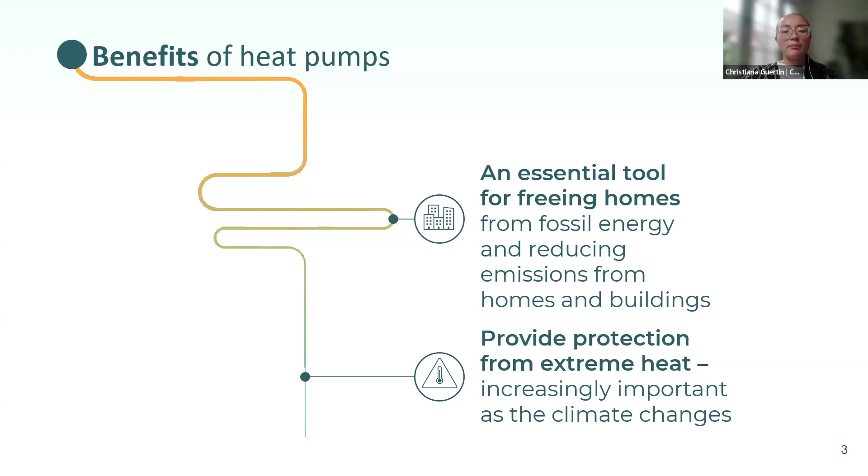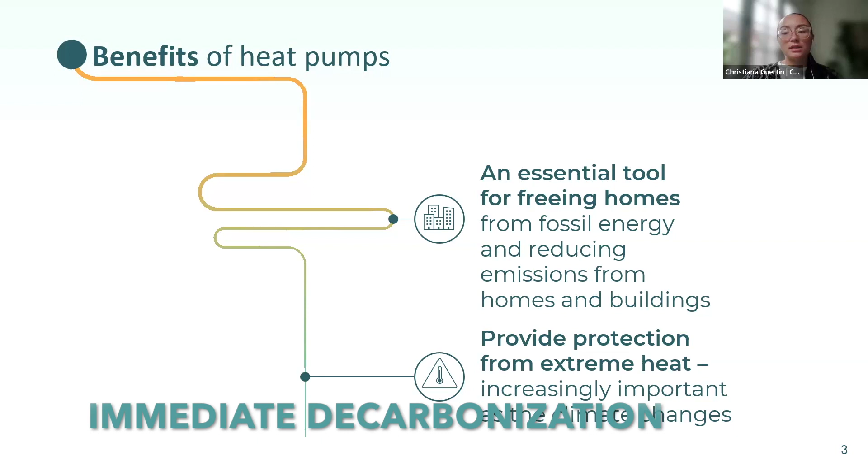So first, I'll start off by introducing the benefits of heat pumps. There are two benefits we've introduced in this report: the resilience perspective and the emissions perspective. From an emissions perspective, heat pumps are crucial in decarbonizing space heating and cooling in homes and buildings. Currently, burning fossil fuels for space and water heating in Canada's buildings accounts for 10% of Canada's total emissions. And the switch from fossil fuel boilers, gas furnaces, or oil furnaces to electricity-powered heat pumps creates immediate decarbonization benefits, especially in regions where grids are already powered by low-emitting electricity, like Quebec, Manitoba, and British Columbia.

But even in regions with relatively high grid intensities, heat pumps emit between 20 to 30% less carbon emissions than gas furnaces because of their high efficiency. So overall, many studies, including ours, have shown the importance of decarbonizing the heating sector in Canada and the effectiveness of heat pumps in getting there.

From a different perspective, heat pumps are beneficial as they provide protection from extreme heat because they double as heating and cooling. Not many consumers know that heat pumps act as both a cooling and heating system, but they do. And with heat waves becoming more frequent and intense across Canada, access to space cooling is increasingly important. So from a resiliency perspective, heat pumps are better than traditional ACs to meet cooling needs because, one, as we'll show in our analysis, they tend to be cheaper, and two, they provide protection from extreme heat in a way that doesn't make the problem worse, whereas ACs tend to lock households into fossil fuel heating infrastructure.

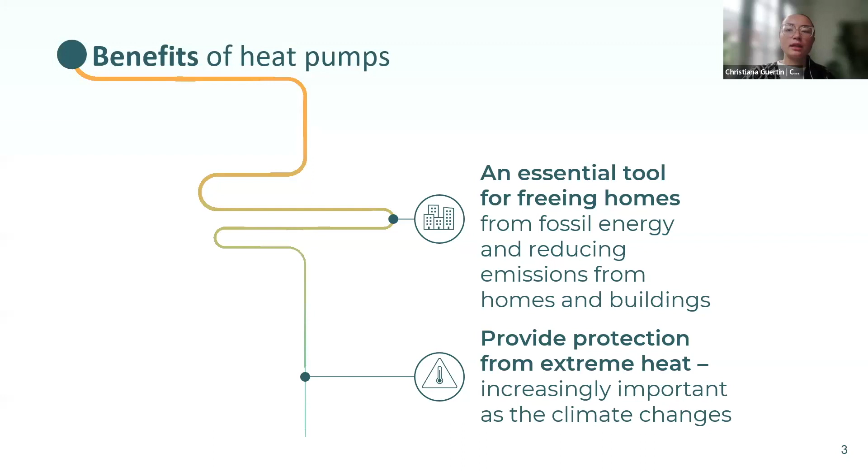So after having gone over the benefits of the heat pumps, I'm going to dig a bit deeper into our modeling approach. So first, we modeled 5 Canadian cities, including Vancouver, Edmonton, Toronto, Montreal, and Halifax. Each of these cities reflect different equipment cost, governmental rebates available, energy prices, and climate conditions.

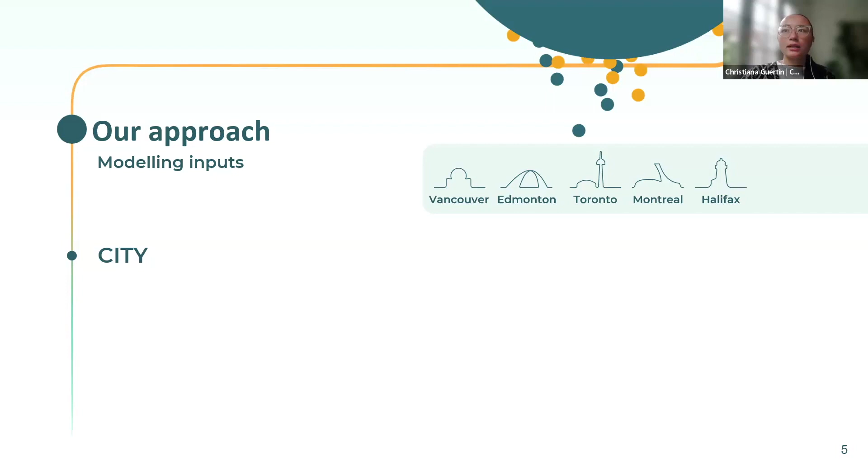Then we captured different building types, including different building ages. So the buildings modeled include single detached homes, townhouses, and 2 types of multi-unit residential buildings, or MURBs, one with a central heating system and one with in-unit heating system.

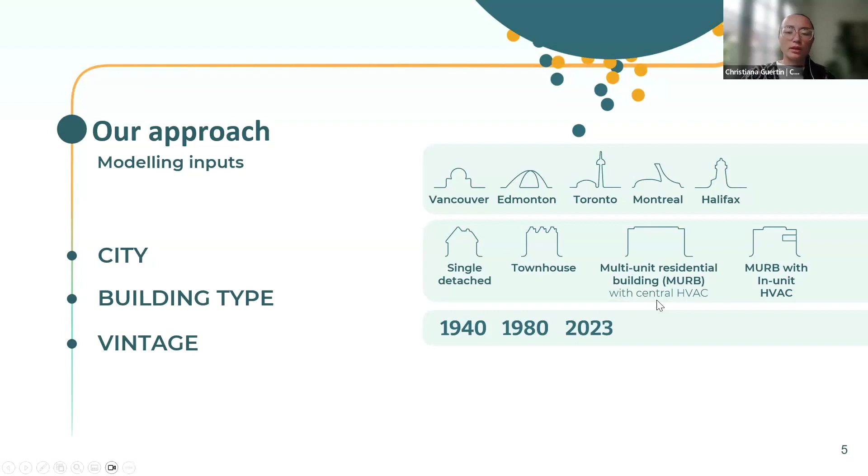And then finally, we've modeled 4 main equipment options. The first representing our business as usual scenario, which models gas heating with traditional air conditioning. And then we have 3 heat pump configurations, which include a standard heat pump with gas backup, a standard heat pump with electric backup, and finally a cold climate heat pump with electric backup.

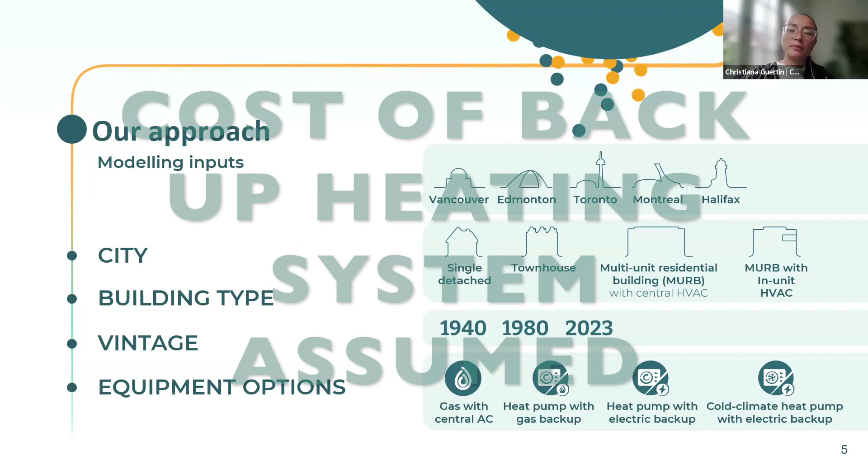So one little caveat that I wanted to mention here is that you'll notice that in all the scenarios that model heat pumps to meet the household's heating and cooling needs, we assume additional costs to install and operate a backup heating system. So this backup or secondary heating system acts as a backup to the heat pump when the outdoor temperatures fall below the optimal levels for the heat pumps to work efficiently.

And this temperature is known as the switchover temperature and varies slightly by region and by technology type. So above the switchover temperature, the heat pump provides all of the heating and cooling needs, while under the switchover temperature, the secondary system is engaged to help meet the heating needs.

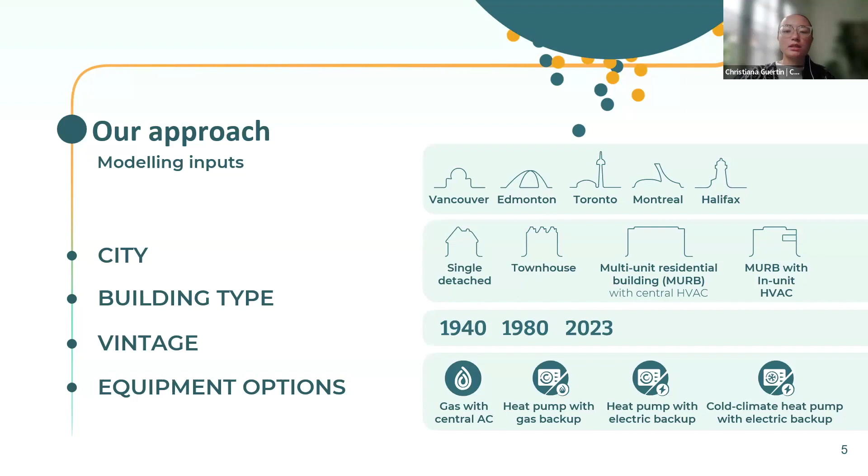And while our model includes secondary heating systems in all of the heat pump scenarios, some buildings may not, in fact, require backup heating, depending on the climate conditions, the building envelope and design, and the specific heat pump technology. So with that said, I'm going to go over a few key items important to understanding our approach.

And first, we've calculated how heat pumps compare to gas heating and traditional AC by using the measure of lifetime cost. So lifetime costs include both upfront equipment and installation cost, as well as average annual operating costs over the lifetime of the equipment. And again, here we're assuming equipment cost on a 2023 date, so assuming that equipment is bought today.

We're not including falling prices or potential falling prices for heat pump technologies, which vary based on different upfront cost for heat pumps today and different projections for energy prices, both the fossil fuel prices and electricity prices. And then we'll explore a little bit how these sensitivities impact; they don't necessarily impact the results all the time, but we'll see how they play a role in the cost effectiveness of heat pumps.

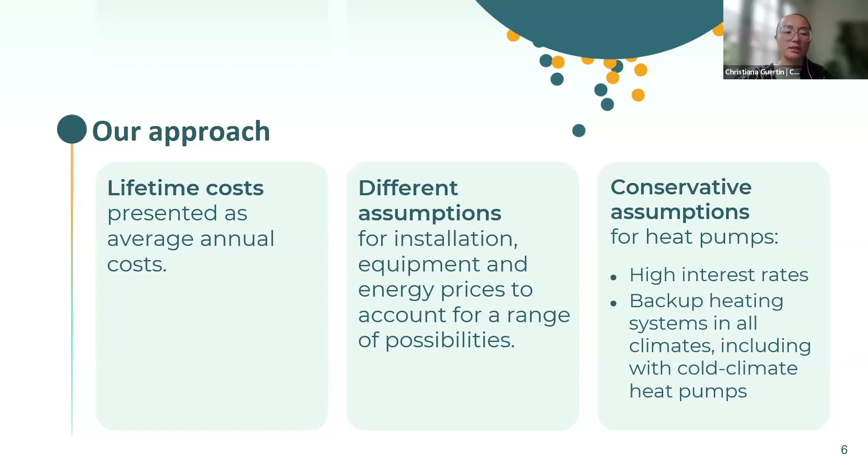And then finally, I want to point out that the underlying assumptions in the model are intentionally conservative. We include these different upfront costs for heat pumps because we do recognize that the market is maturing. So heat pump technologies have a range in costs, whereas gas furnaces stay very steady. And as I mentioned earlier, we include backup heating systems in all homes, although in some regions and in some building types, they may not need backup systems. So with that said, I'll move on to the results of our analysis.

So first, we found that despite our conservative assumptions around heat pump technologies, heat pumps are already lower cost than gas-fired space heating with air conditioning in most cities and building types that we modeled. This is especially true for single detached homes, townhouses, and MURBs with in-unit HVAC systems.

So the exceptions tend to be in MURBs with central heating systems because they have very high heating loads and they're charged commercial prices rather than residential prices. But that's not the case for all MURBs with central heating. It's a selected few, some in Toronto and Vancouver we found.

So we'll see a bit of that in the interactive tool, but I also want to highlight here that while we did model different building ages, we found that heat pumps are cost effective even in older, often less efficient homes.

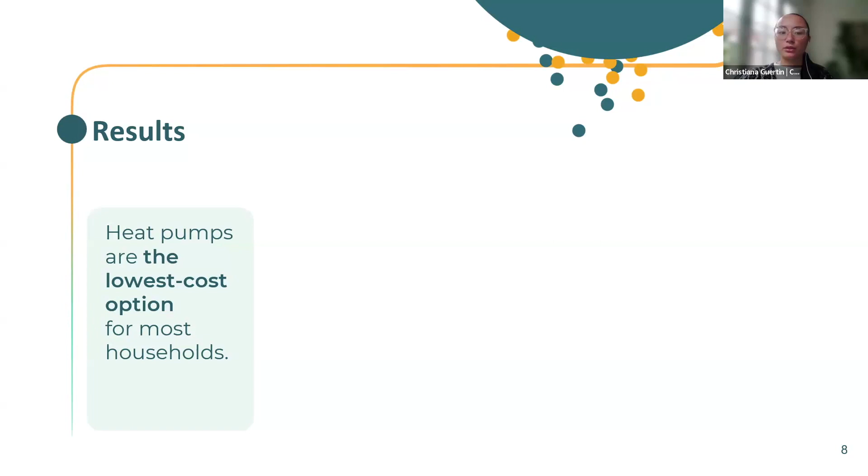It doesn't change the merit or the case for heat pumps, whether you're in a new or old home. The only thing that changes is the rebates that are available. So actually sometimes heat pumps can appear to be cheaper in older homes that qualify for rebates where new homes don't.

So for our second result, we found that the main driver of cost competitiveness across cities are relative gas and electricity prices, as well as climate conditions. So what I mean by this is that in regions with relatively low electricity prices in comparison to gas, such as in Montreal and Halifax, heat pumps consistently outcompete gas heating with cooling. And the opposite is true in places like Edmonton, where gas prices are relatively cheap in comparison to electricity. As a result, in Edmonton, the business case for heat pumps is often marginal, but sometimes favors gas heating and cooling.

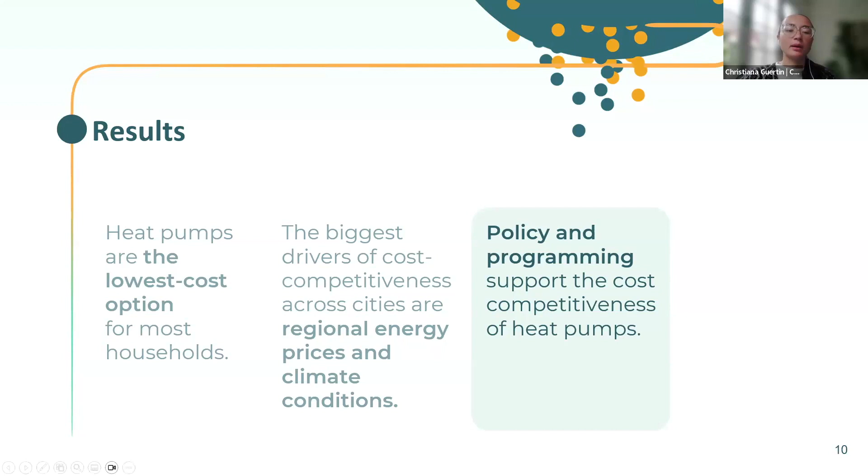So our third finding is that policy and programming, specifically governmental rebates and the scheduled carbon price increases, support the cost competitiveness of heat pumps. So for this one, I'm going to pull up a graph here to help display this finding. And what our analysis has shown is that the existing government policy supports the business case for heat pumps and sometimes tips the business case in favor of heat pump technologies. So this is especially true in Toronto and Vancouver, which are displayed in this figure.

And here we've broken down the cost to see the impacts of carbon pricing, which you can see drawn up in that upwards arrow, and the impacts of rebates, which is shown in that black arrow, kind of drawing the cost down. We focus our attention on the first and third column. So the first column representing the gas heating system with AC, and the third column representing the heat pumps with electric backup. And you can see that without carbon pricing driving the cost of gas heating up, and the available rebates driving the cost of heat pumps down, the first column, again, the gas heating with AC, may outcompete heat pump technologies.

So again, I've displayed Toronto and Vancouver because they represent cases where the business case for heat pumps would have been marginal or would have flipped in favor of gas heating absent these policies. But our analysis has shown that in places like Montreal and Halifax, heat pumps are already cost competitive, even absent these policy programs. With that said, we do recognize that the rebate programs available do help support consumer uptake from the upfront cost perspective, because heat pumps tend to have higher upfront costs than gas furnaces.

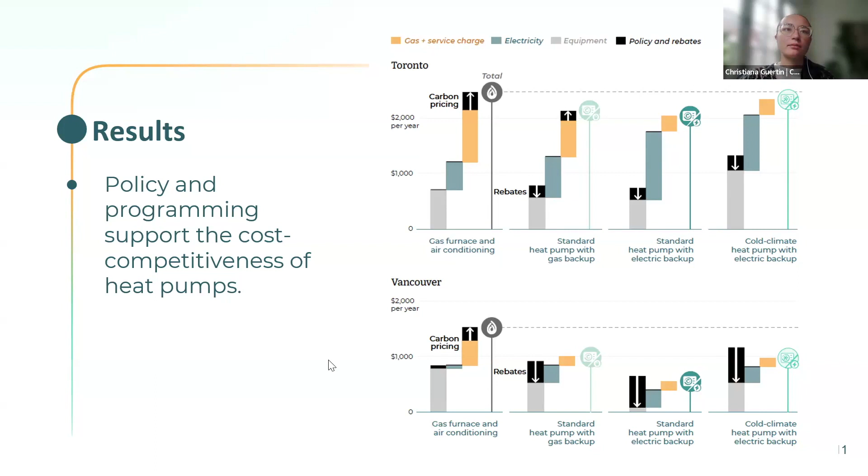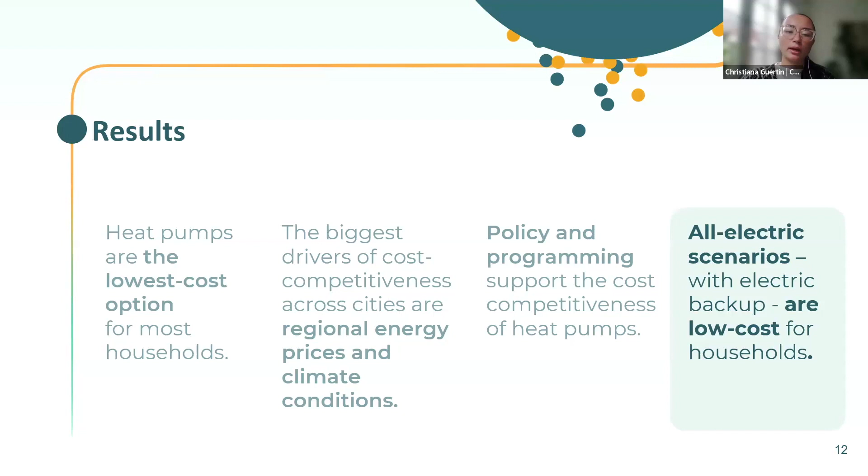So with that, I'll move back to our final result. So finally, we found that from a property owner's perspective, the fully electric heating and cooling systems tend to be the lowest cost option, outcompeting heat pumps with gas backup. This finding is especially true in Vancouver, Toronto, and Halifax, but varies in Edmonton, where the gas prices support the hybrid systems, and in Montreal, where the rebates are quite high for heat pumps with gas backups.

So now going through a quick summary of our results, I'm going to navigate towards the online interactive. Our URL is heatpumpcalculator.ca. It's online and live now. So as I mentioned earlier, we built this online interactive tool to really allow users to compare the cost of heat pumps to gas heating with AC, while allowing the user to navigate different circumstances, such as different cities, building types, and sensitivities.

Here, I can click the Get Started button, and we'll see that we first have to choose a city. So I'm going to go with Montreal, since that's where I'm located, but we have Vancouver, Edmonton, Toronto, Montreal, and Halifax. And we also have an average of all 5 cities for people who aren't living in any of these regions, or may not have similar energy prices, rebates, or climate conditions to the cities that we have here. So I'm going to go with Montreal.

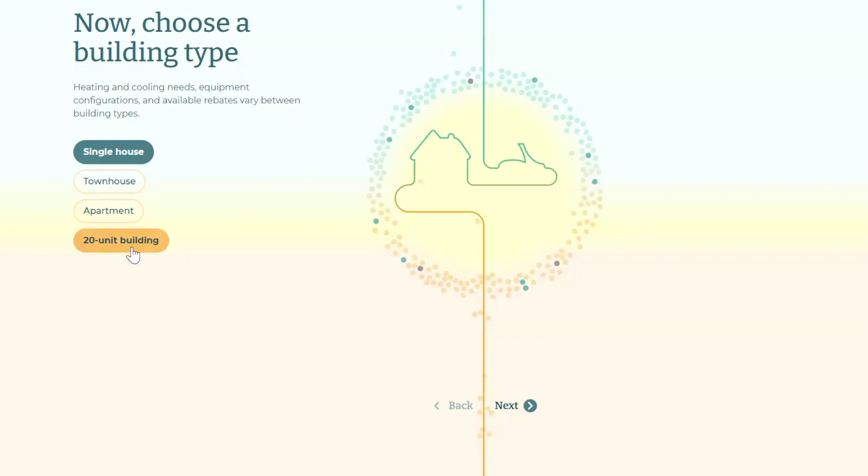Now it brings us to select a building type. We have a single detached house, a townhouse, and an apartment, which is the MURB with in-unit HVAC systems, and then the 20-unit building, which is the MURB with central heating. So I'm going to go with a townhouse. And then here, the final choice is the building age. Like I said, even in some of the older homes, heat pumps tend to be more cost effective.

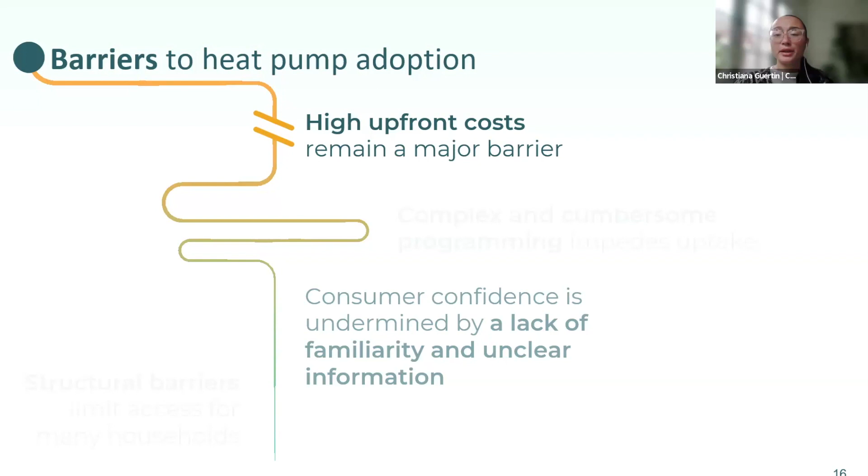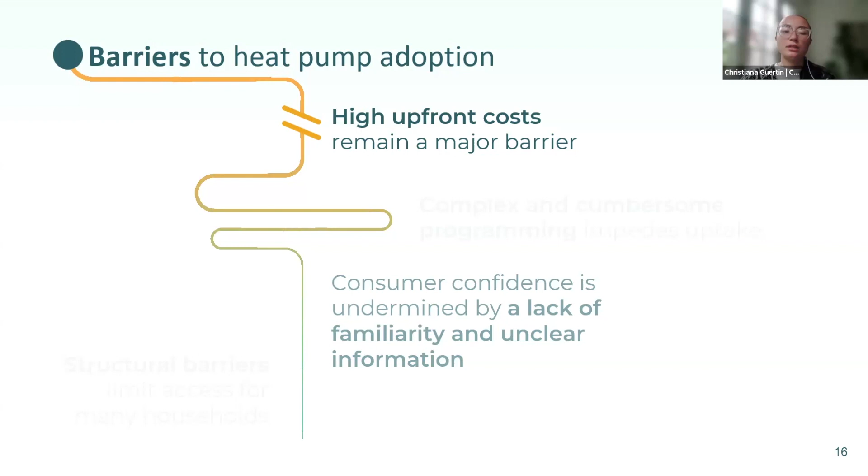And then finally, another point I want to draw is that relatively high upfront costs pose a particular barrier for lower income households and renters, meaning that households that are often most vulnerable to climate change may be locked out of seeing the lifetime savings heat pumps can deliver.

The third barrier relates to the complexity of available rebate programs and supports for heat pumps. As we had seen in the graphs before, rebates certainly support the cost effectiveness of heat pumps, but we find that access to these programs is a challenge for many households. These programs are often complex and challenging to navigate. There are multiple support programs offered by different levels of government, depending on the jurisdiction. This information is often decentralized, published by different sources. So gathering the information on available rebates and supports can be difficult.

Furthermore, each program has different qualifying criteria, including different equipment eligibility, different approval times, and different application processes. So while you may have access to a provincial rebate, that application process will be different than the federal application process. So the complexity of information and the application processes really make it difficult for homeowners to understand what programs are offered for their specific situation.

And then one last burden about the current program structures is that the existing rebate programs confirm eligibility and disburse payment only after the installation process is complete. This includes the federal Greener Homes program. So in these situations, households have to carry significant upfront costs for installation before they are reimbursed, which is a cost that many lower income households are unable to carry. So this is a major psychological barrier for households who are not sure if they will be approved and will receive the rebate funds.

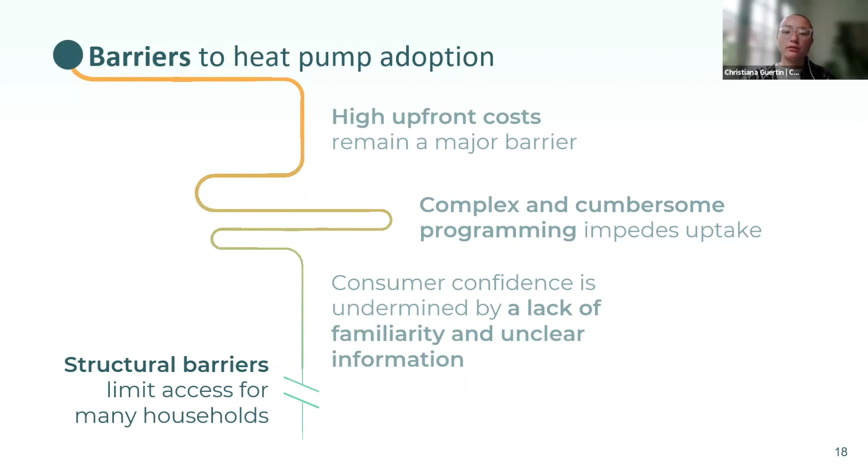So with that, I'm going to try to go as quickly as possible through some of our policy options for addressing these barriers. So first, we found that the existing policy mix makes heat pumps the lowest cost heating and cooling option for most households in the cities we modeled, but there may eventually be a case for sunsetting some programs as the cost of heat pumps falls in the future. However, we find that these supports currently need to target lower income households in vulnerable communities such as renters, and those types of rebates and support programs will likely need to be maintained over the long term. However, until the market for heat pumps becomes more mature, we recommend that all orders of government maintain their current policy and rebates.

Secondly, we found that governments should streamline existing programming and improve equity of access. These improvements to existing programs could include loosening requirements for home energy audits as a condition of eligibility. It could also include harmonizing equipment eligibility and other eligibility criteria across the different jurisdictions, and improving access for renters by broadening the eligibility for landlords to access rebates for rental properties. In addition to the improvements that I mentioned, we also believe that governments should consider streamlining programs to reduce or eliminate upfront cost for consumers, for example, through point of sale rebates.